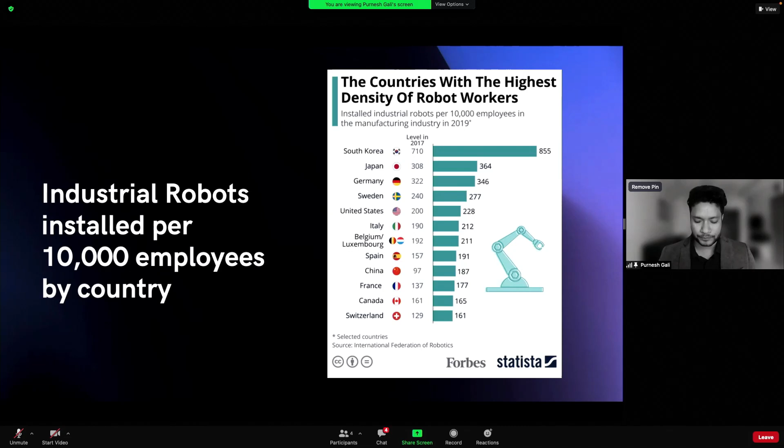Those are the benefits we are seeing today. While some say autonomous cars might or might not be possible, the important thing is that while we are aiming to build them, as consumers we are still getting some benefits. This is a question that is more interesting to me in my line of work. What I'll try to explain is some of the areas where we can build some of these building blocks today, with the help of AI. Irrespective of whether we'll get an autonomous factory or not, these are the things that are certainly going to help us today.

But what is interesting is if you look at the Hindalco value chain. We essentially are a metals and mining company. We make aluminum and copper. We are a B2B2C company, which means that we produce something that our end customers convert into final products like beverage cans, or our aluminum is used in aircraft or automotive. The applications are very wide. If you look at our value chain, it's extremely complex.

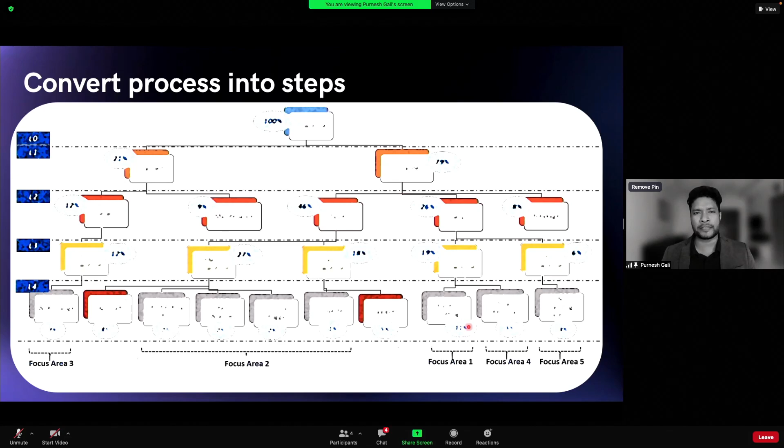In this case, at level 4, red indicates that solving it requires beyond data, but everything gray is a data problem. We could build a model to solve that. So first, identify what is a data problem, where AI can help and where it cannot, with very finely, narrowly defined problem statements. You started with quality at level 0, but by level 4 you would have come up with building a prediction model for something.

So once you convert a process into steps, how do you automate a step? You have sensors, get real-time data from the sensors. Once you have the real-time data, build a model that will accurately predict the outcome. The prediction could be a few minutes out or a few days out based on the complexity of the process.

But it's important to get the prediction right. Your prediction has to be as close to your outcome as possible, because this is the fundamental step. Then step 3: you reverse engineer your prediction model and build a recommendation system, the so-called prescriptive model, saying if you do these 2 or 3 things, you will avoid that unwanted outcome.

And then someone has to act on those recommendations and close the loop. While 1, 2, and 3 are possible, I believe automating step 4, closing the loop and making machine-to-machine communication happen, is really difficult. If you're able to do that, that itself could be autonomy. 3 to 4 is easy, but closing the loop from 4 to 1 might be difficult. But it doesn't matter.

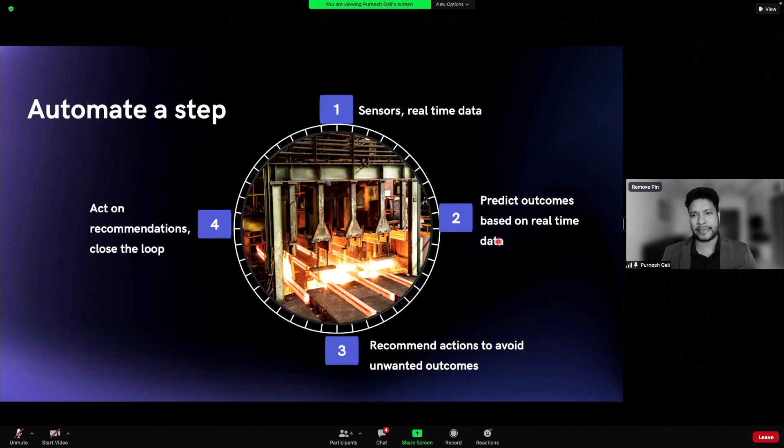Even if you're able to do 1 and 2 today, that itself is extremely useful. This is what I mean by building these blocks today with the ultimate goal of something else, but still benefiting today. Let me bring it home with a real example that we had developed.

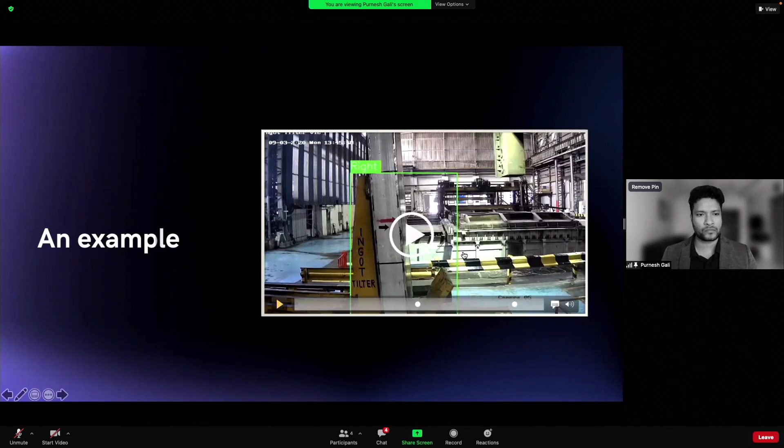So I'll play the video first, and then... there's no volume. So let me just pause the video and explain.

What you are seeing is a video feed from one of our factories. This is an aluminum ingot. The process is quite simple. You see the ingot and the arrow pointing in one direction. The right way to process this ingot is that the arrow has to be pointed in this direction, pointing to my right.

If the ingot is processed with the arrow pointing to the left-hand side, it is going to have a catastrophic impact downstream, because this is a very upstream process. We might have to recycle this ingot. That becomes very expensive, and as I said, it's a catastrophic event, right?

Now, how do you ensure that this ingot is processed always on the right side? Of course, we've looked at multiple technologies, and historically, a few incidents happen every year, and we have a large number of factories. Across factories, these incidents quickly pile up. So we looked at multiple solutions, conventional solutions, automation, sensors and everything.

But finally, what we have decided is that rather than doing any CapEx related investment, rather than installing more sensors, we have leveraged the existing CCTV cameras that are already on the shop floor, taken a video feed from that, and built a computer vision model that alerts in real time if this ingot is being processed on the right side or not, right?

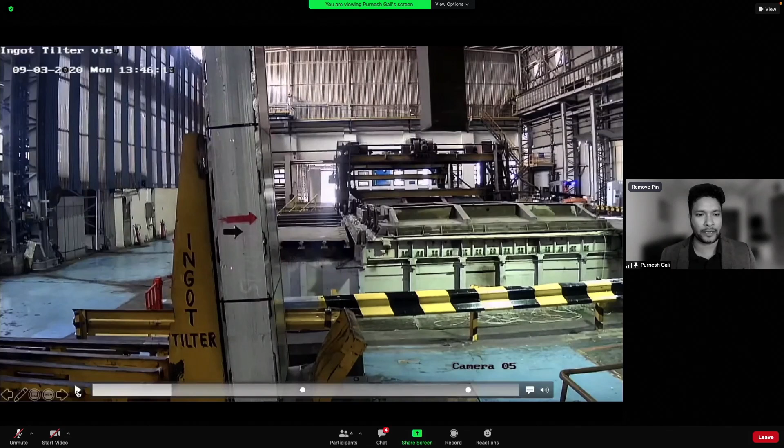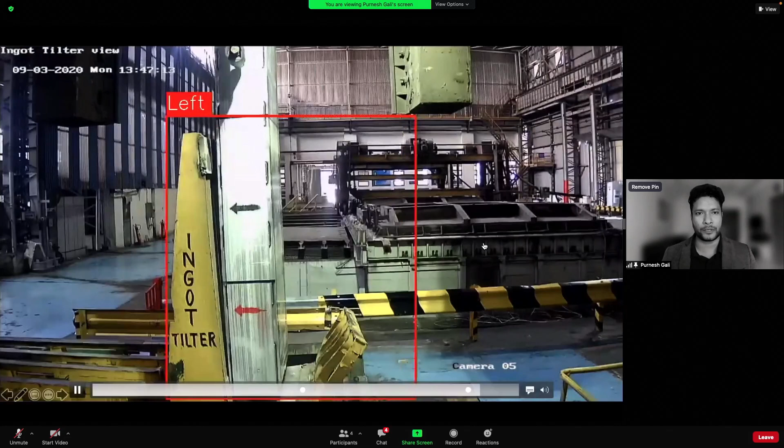So let me just play the video now. It comes, it'll take that and then it'll process, right? This is just a demo video that I've taken, so ideally they don't do it. As you can see, the moment the ingot is on the left-hand side, the alert came out. So what we have done is we have built this model.

In a first step, we have installed a PA system on the shop floor, so that every time an ingot is processed on the wrong side, the alert goes out very loudly in that particular area on the shop floor, right? So everyone becomes alert and then stops it. We monitored it for a few months, got feedback and then improved the model.

And once the shop floor gained confidence in the model, as a second step, we have closed the loop. Rather than sending an alert through a speaker on the shop floor or an SMS alert, we send the signal back to the control system. So now the control system waits for a 0 or 1. It proceeds only if it receives a 1, a go ahead from the computer vision model. If it doesn't, it will just wait there. The process itself won't start, right?

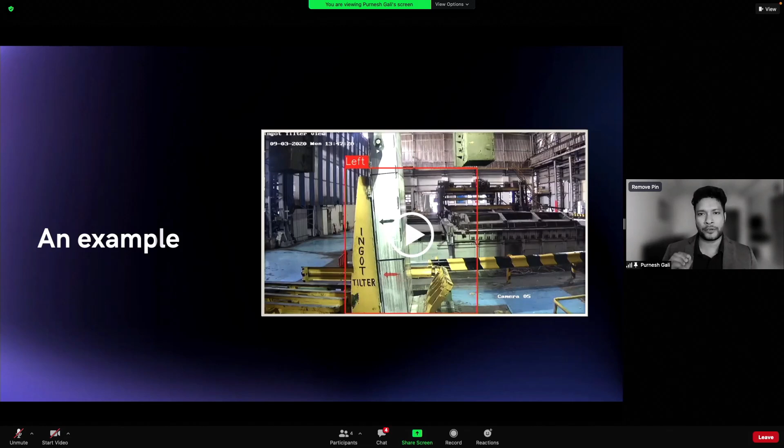So what we had done is taken the historical data of these thermocouple samples, and then built a prediction model that predicts the temperature of all 8 ingots to an accuracy of plus or minus 5 degrees. Plus or minus 5 might not sound like a big deal, but at 500 degrees, getting plus or minus 5 degrees is an extremely challenging problem. That is the prediction side of it.

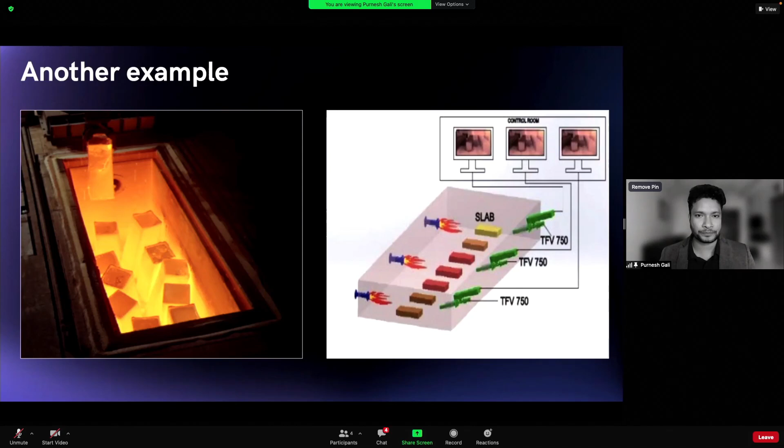So rather than alerting it again, control it, build a recommendation. I'll come to that. Loop it back, close the loop to the control system so that your process will become more efficient. Right. So what I have, right? So the way I could summarize, right?

Sorry to interrupt, Mr. Gall. Just to keep in mind that you have 2 minutes left for your presentation. Thank you.

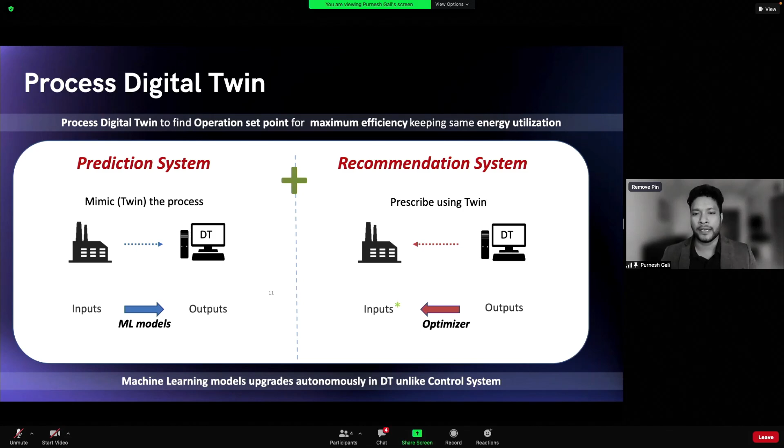So you will build what we call a process digital twin, right? You build a prediction model first, to predict an event, and that has to reach a very good level of accuracy. Once you have that done, build a recommendation engine that will prescribe something. If you have a prediction engine and a recommendation engine, then you will have a very good shape of a process digital twin.

So this is from a process perspective, but this is still at a business level, maybe a little bit high level. Where things get really difficult is when rubber hits the road, which is when you try to build the model. You have a lot of data coming from your data sources, IoT data, customer data, raw material data, and you have a lot of techniques at hand, all publicly available thanks to open source libraries.

Using this data and these techniques and keeping the business problem in mind, you develop a few approaches. For example, as simple as: do I need a regression based model, or do I have to go with a classification model? You come up with various approaches, but where the decision making is really complex is which model to choose.

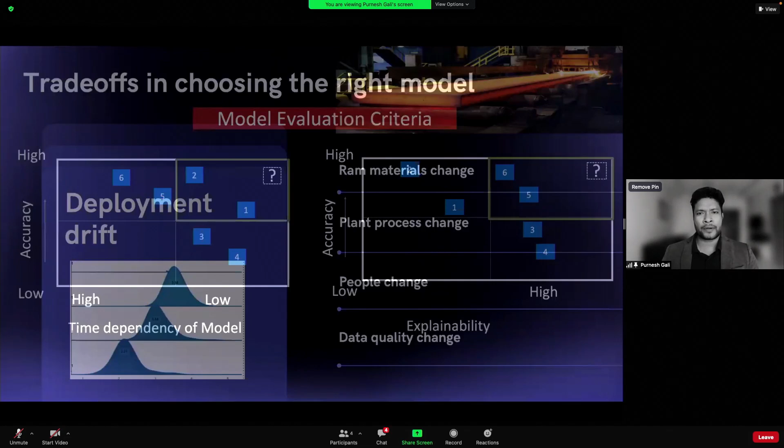Because in the real world, you would need models that are highly explainable, highly accurate, and that just work continuously without failing for multiple months. But such a model doesn't exist. What you'll end up having is something scattered all over the place. So speaking with business and multiple stakeholders, you have to balance between accuracy versus explainability versus time dependency of the model, amongst other criteria.

And even if you've solved all of that, let's say you've managed to finalize an approach, if the fun part was building the model, probably the boring part is maintaining the model, the so-called deployment drift. Because your process changes at a factory, your raw material changes, people change, data quality changes. So your data will definitely change over a period of time.

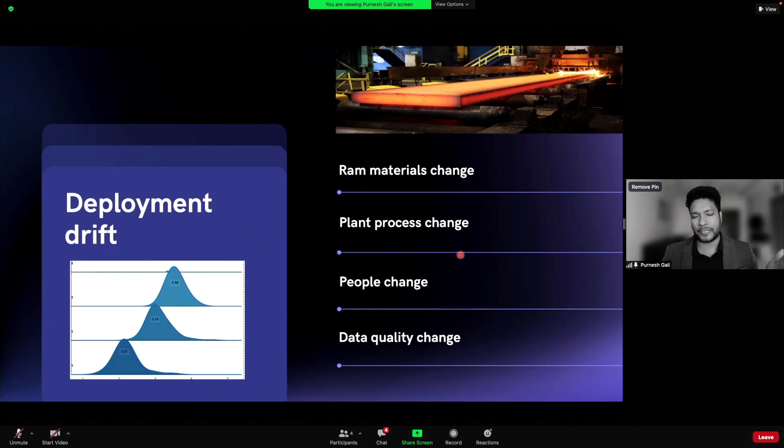So how do you make decisions around how often to retrain the model? Can retraining the model be automated? This is where we get to the so-called MLOps. This is extremely important, but often overlooked. Even if you're able to do all of that for one process, remember that so far you have done only one simple process, in manufacturing.

You can do the same thing from a logistics perspective as well. Identify your top level problem, drill it down until you build many models that will be able to help you. I'm not going into detail in the interest of time, but over a period of time you will end up having thousands of models solving very simple problems. In isolation they might look very simple, but they are optimizing and making your products cheaper, better, faster.

If you're able to expand this to other areas as well: when people think of digital twin, they might think it is only for your factory. But digital twins could be built for every function and area in your business. There could be a supply chain digital twin, a process digital twin, a product digital twin, an asset digital twin. If you take a methodical approach, build these building blocks, and model everything, this is probably the ideal state, not as easy as I'm explaining.

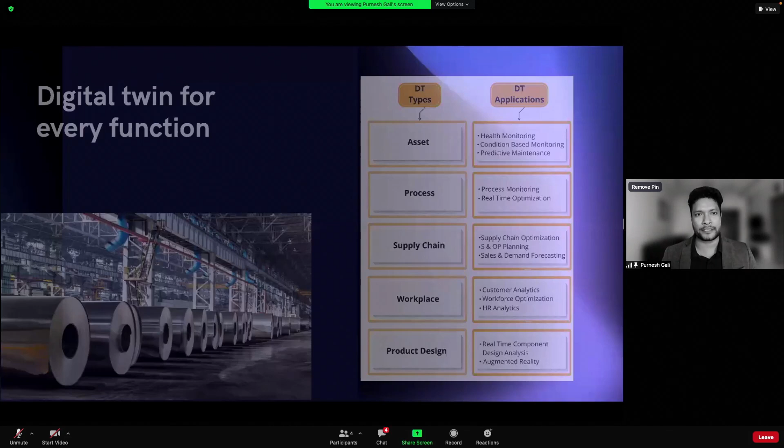I'm sure most of you practitioners would understand. And of course, the goal is to reach here, which means that we have a long way to go.